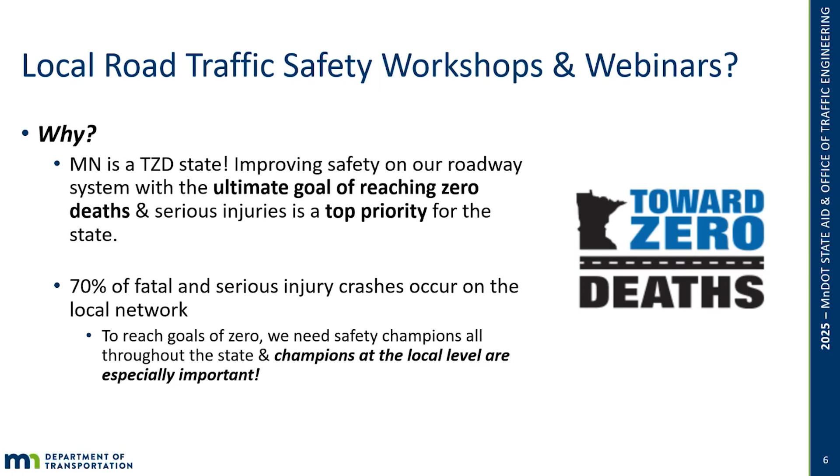Education is vital, but it is one piece of Minnesota's multifaceted strategy to reach zero deaths. First, Minnesota is finalizing its 2025 through 2029 Strategic Highway Safety Plan, which guides our efforts through the 4 E's: engineering safer roads, enforcing traffic laws, enhancing emergency response, and educating all users. Second, because nearly 70% of serious injury crashes occur on local roads, MnDOT directs about 70% of its federal safety funding to local agencies, aligning resources with where they are most needed. Our workshops and webinars are a key part of this comprehensive approach, empowering local roadway owners with the tools and knowledge to make our roads safer and save lives.

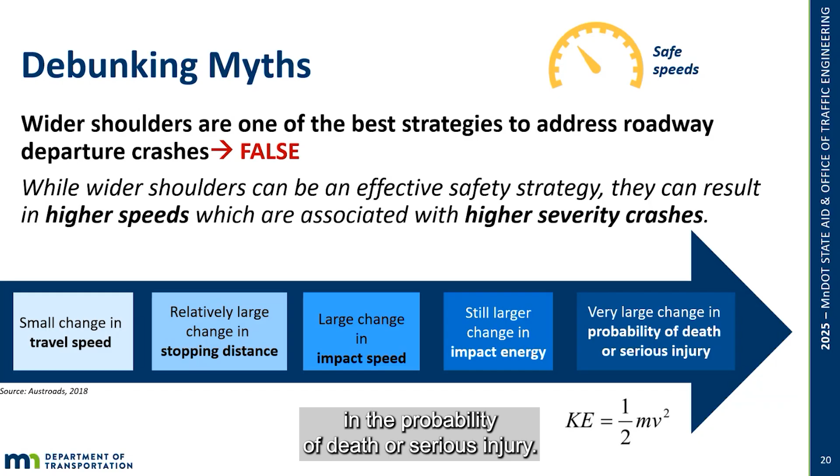That has an even larger impact on the energy that's transferred to the human body. And from what we just talked about with the safe system approach, we recognize that this impact energy has a really large impact in the probability of death or serious injury. If we go to the next slide.

Another way to look at this is to look at some of the expected crash reduction factors and planning-level cost estimates for these strategies. Howard's going to get into a lot more details, but quickly comparing the crash reduction factor of paving deteriorated shoulders compared to rumble strips, enhanced edge lines, and chevrons, we see that paving shoulders is much less effective at reducing crashes. It's also a lot more expensive. That's why we're focused on strategies like rumble strips, enhanced edge lines, and chevrons, these lower cost, higher effective strategies.

Another note is that MnDOT has found that often the reduction of crashes where wider shoulders are installed is actually a result of other elements installed along with those wider shoulders, things like rumble strips, improved side slopes, access management, those kinds of things. So we wanted to address that up front, why we're not going to talk about wider shoulders and why we're focused on these other strategies today.

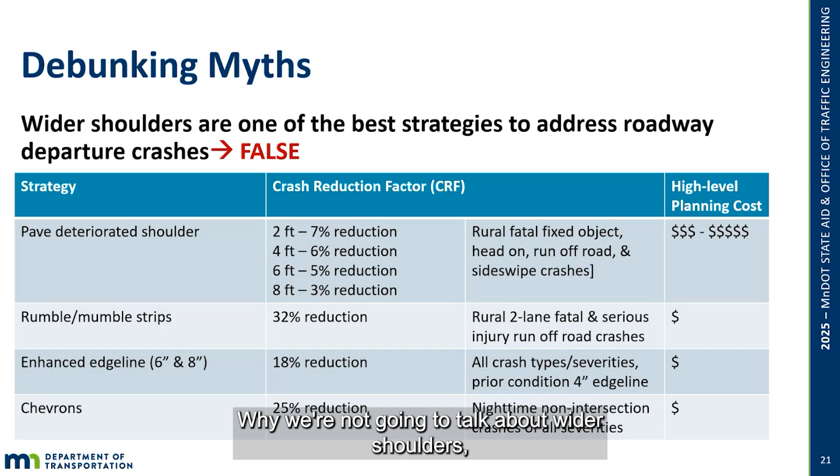For the next 90 minutes or so, Vic Lund and I will be sharing information about Minnesota's approach to addressing road departure crashes. I'll spend most of my time providing an overview and then talk about effectiveness, and Vic will be sharing his

observations and experiences in St. Louis County. Next, please. Oh, right here.

We follow the basic approaches identified in AASHTO's Strategic Highway Safety Plan, and Germa and Derek have mentioned it, but the notion is the best thing to do is keep vehicles on the road. If they don't leave the road, then what's outside your shoulder and down in the ditches is really not of any consequence. So we focus on things proven effective at helping keep vehicles on the road, making the road edge more clearly defined so people know where it's at. Things like rumble strips, and we'll also talk about something called mumble strips, I'll explain those later, enhanced ground-in wet reflective pavement markings, chevrons, and a treatment to enhance friction in curves when the pavement is wet.

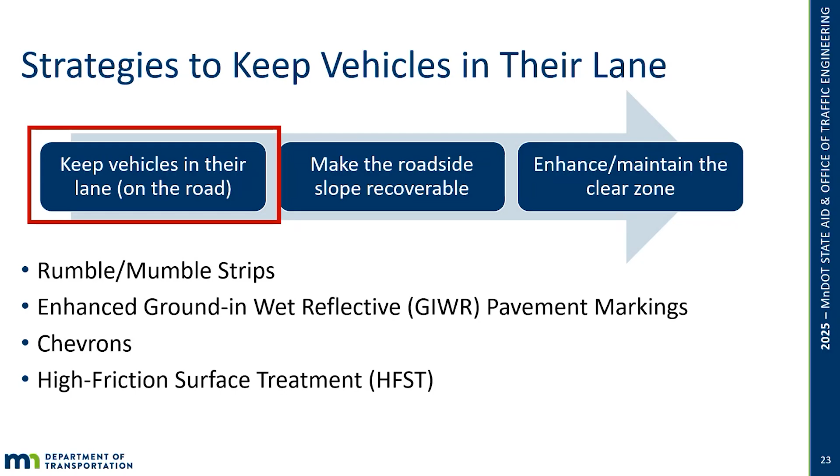Before we get started though, Maddie has a polling question for you. So for each of these countermeasures, we are going to have two questions for you to answer. Please keep that Mentimeter pulled up. The first question we'll ask at the beginning every time is how would you rate your level of knowledge, specifically this time on rumble and mumble strips, on a scale of 1 to 5, 1 being not familiar, 5 being very familiar.

We'll give this a few more seconds for folks to respond, but it looks like on average folks are pretty familiar with rumble and mumble strips. We'll head to the second question, a short answer question: what are the barriers that prevent you from implementing rumble and mumble strips right now? This is our first one, but these two questions will reappear.

Okay, we've got noise level, a lot of noise complaints. Public with the noise, absolutely. People, money, cost, narrow pavements, no paved shoulders, again the community, funding, road width, county or city standards, and again some of that public pushback. So we'll keep moving through our presentation, but appreciate your insights, everyone.

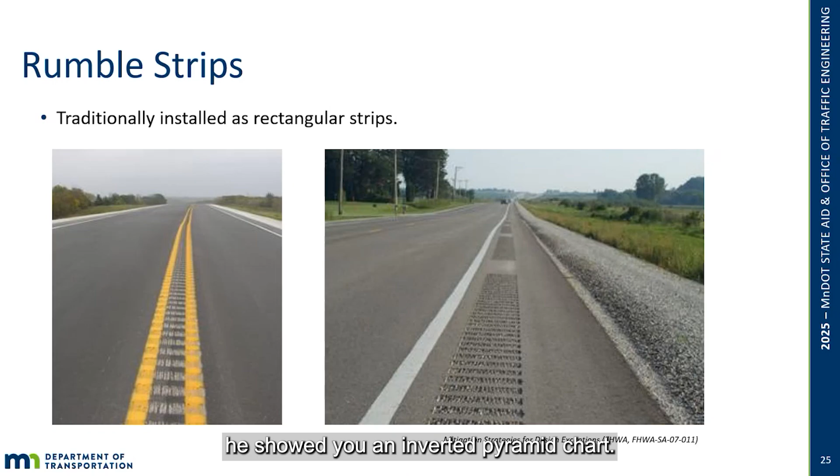As Derek mentioned, we choose to focus on road departure because road departure crashes account for 50% of our fatalities and 40% of our severe injuries. If you recall, he showed you an inverted pyramid chart. The number across our entire county system is very large, something on the order of

150 of these severe road departure crashes a year, but that's over a 40,000 mile system. The density of severe road departure crashes per mile is 0.01 per year, meaning any given mile is likely to see a severe road departure crash once in 100 years. Another statistic is that 90% of the locations that had a severe road departure crash in any given year hadn't had another one in the 5 prior years. So the low density of these crashes was a real challenge.

How do you develop a strategy to prioritize the system, in order to identify the segments that are most at risk and then worthy of implementation of a project?

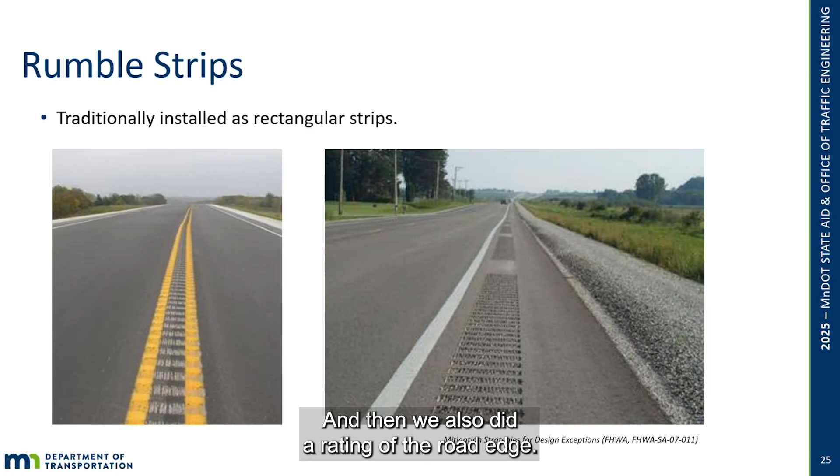Segments with 3 or more of these risk factors represented a minority of the system, about 30%, but a majority of severe road departure crashes. The priority segments had crash densities that were 40% higher than average.

A strategy for selecting safety countermeasures was based on the notion that the solution to a low density of crashes is to widely deploy strategies over as many miles as possible. The only way to do that was to focus on strategies that are low cost. That led us to the use of rumble strips and enhanced edge lines.

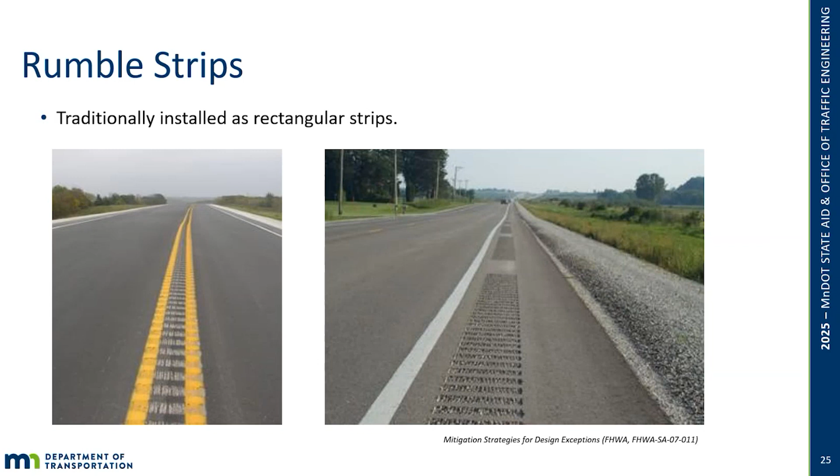To date, rumble strips have been deployed along about 3,000 miles of our paved county system and over 8,500 miles along the state system.

Following the installation of these rumbles, MnDOT has found substantial crash reductions, lowering the number of fatal and injury crashes and run-off-the-road crashes. You can see in the photos here that our original rumble strip design was a rectangular cut that started at the road surface. I'll come back to that again in a minute.

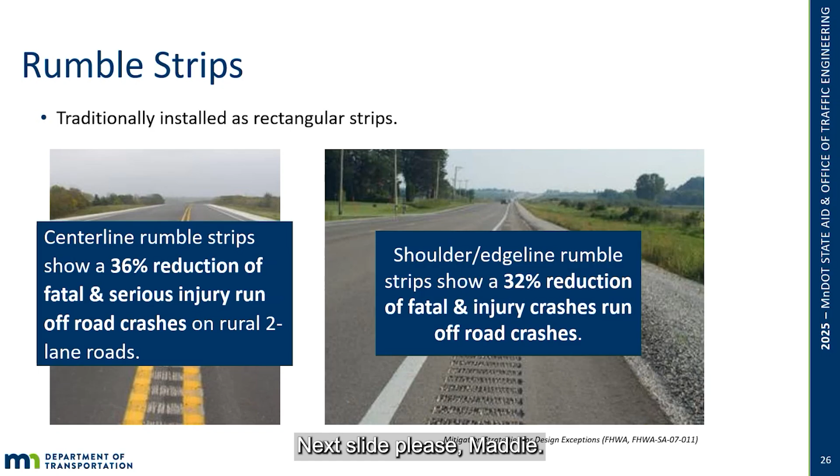This photo shows what we call a rumble stripe, where the edge line is placed over the groove. We encourage counties to consider this if they're considering an edge rumble. Installing the pavement marking over the groove has two particular benefits, primarily at night and in wet weather—there'll always be some of the marking that is above the water level. Rumble stripes, as we'll show in a photo later, improve wet weather nighttime visibility.

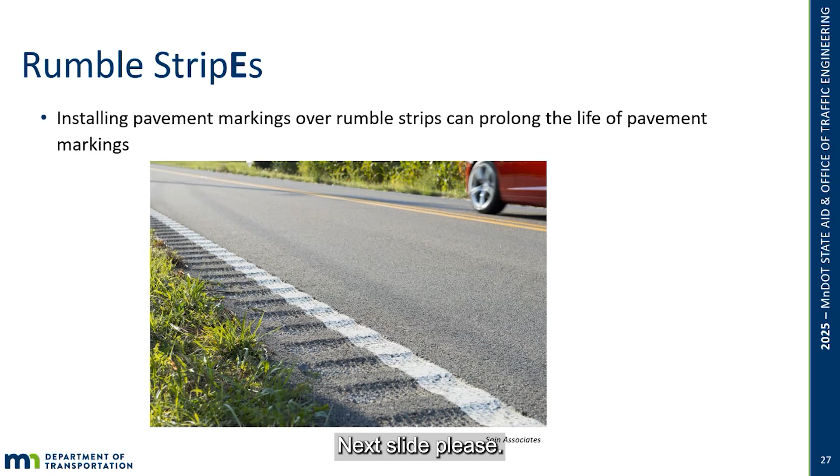We've also found that putting some of the pavement marking material down in a groove prolongs the pavement marking life. It makes some of the pavement marking inaccessible to snow plows, which we'll talk about several times. I also mentioned the notion of mumble strips, or sinusoidal rumble strips, and you can see what they look like.

Just a little bit of background. The first wave of installation of rumble strips done by the counties had a good effect. Obviously, the number of crashes went down. But when you're first, there are things you just don't anticipate.

One of the things not anticipated was the level of complaints from adjacent homeowners about the noise. The increase in noise level was real, something on the order of 15 decibels, and attempts to justify the use of rumbles on the greater good associated with crash reduction didn't make a lot of sense to homeowners who would say there's never been a crash in front of my home. Given the density of 1 every 100 years for these severe crashes, it's entirely likely the homeowner was telling the truth. There had never been a crash in front of their home. Why are we doing this?

In our selection process that we suggested to the counties, we even accounted for the presence of homes. We only made the recommendation where the density of homes was very low, less than 1 per every quarter mile. But complaints were still common.

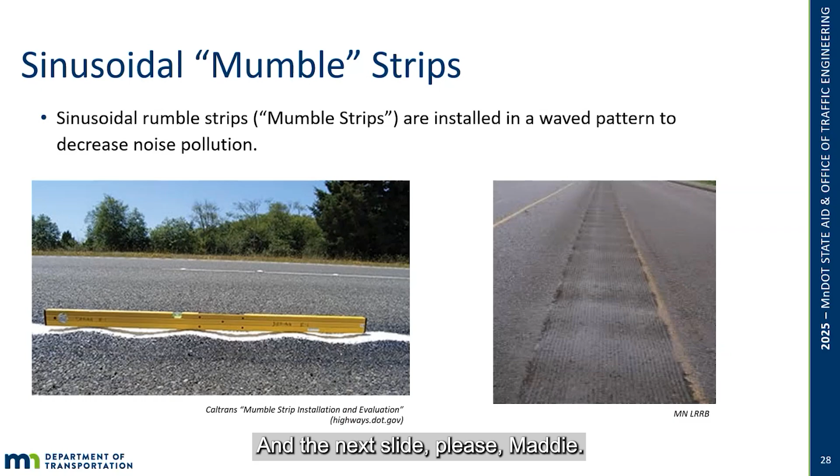The sinusoidal rumbles reduced the exterior noise levels, but were able to maintain interior noise levels and vibrations. MnDOT found there was no difference in performance between the traditional vertical cuts, rectangular cuts, and the sinusoidal cuts. So the use of sinusoidal rumble strips has proven to be a very good thing.

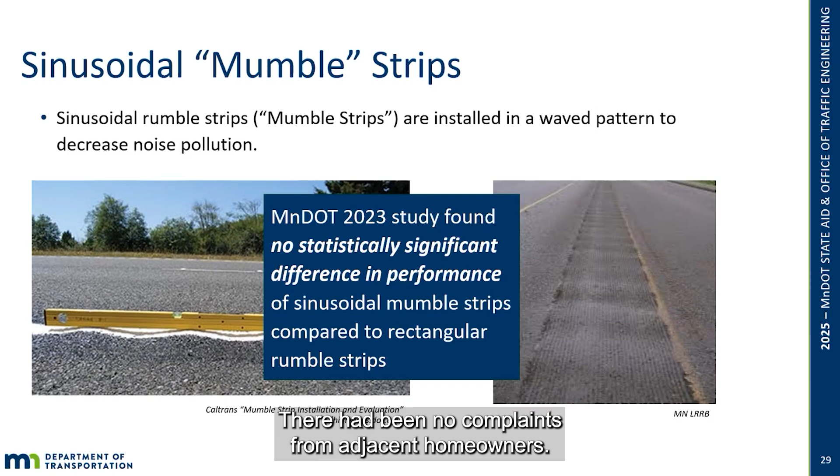We've asked in each of the meetings we had last summer whether people heard any public complaints after they used the sinusoidal rumble. The answer was uniformly no. There had been no complaints from adjacent homeowners. Next slide, please, Maddie. This is the proof, if you will.

Over on the far right-hand side of this graph, you can see that the increase in decibels and noise levels associated with the rumbles was substantially reduced. This explains why there have been no complaints. So most agencies that use rumbles are in fact converting over to the sinusoidal strips. There's no price differential, the effectiveness is still there, and the complaints basically go away. So it's better all the way around.

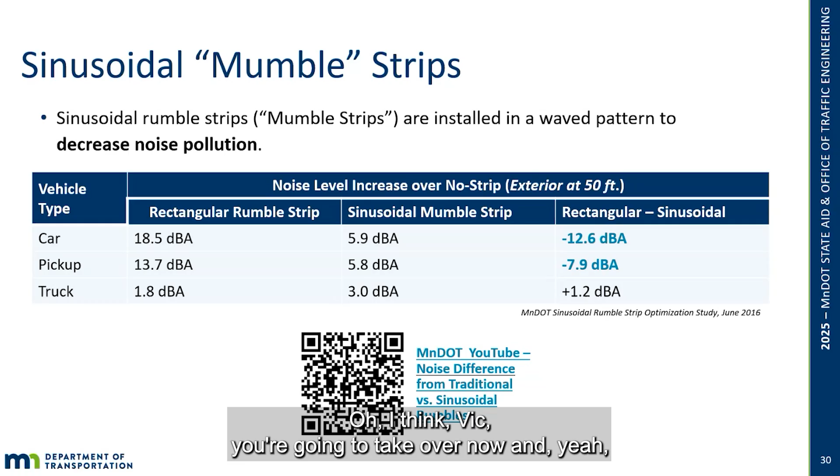Let's see. Oh, I think Vic, you're going to take over now. Yep, talk about your experience in St. Louis County.

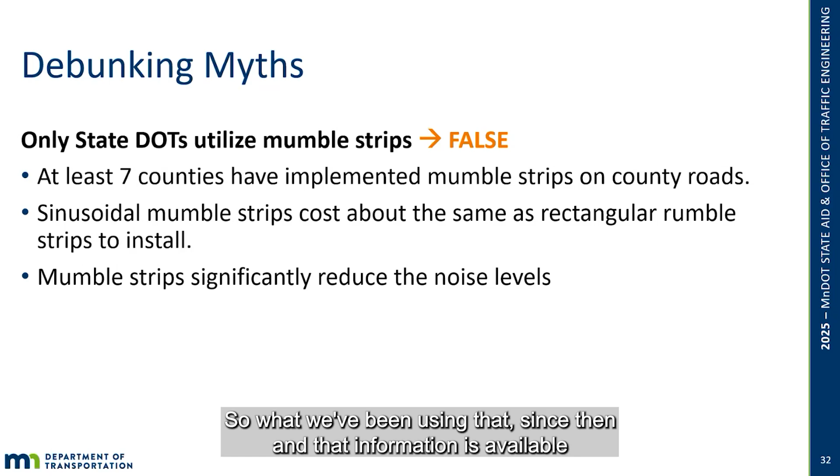Like Howard said, there was a Minnesota effort about at least 7 years ago to design our version of sinusoidal rumble strip. We looked across the country at different styles, California was one of them, and we came up with something similar to other states but with a definite Minnesota variation. We've been using that since then, and that information is available on the Minnesota DOT website if you're interested. Next slide.

One of the things we've heard as an incidental benefit is for snowplow drivers. Here in St. Louis County, in northeastern Minnesota, we sometimes get lake effect off Lake Superior, or blizzard conditions, typical Midwest winter conditions. One of the things we've heard from snowplow operators is an appreciation for having rumble strips either at the center line and/or at the shoulder, because it helps them in those very limited visibility conditions to know where they are on the roadway.

For example, I didn't grow up in the Upper Peninsula of Michigan, but I lived there for some time while going to school. I've been through many interesting winter weather events where you're driving 5 miles per hour and that seems too fast.

But it's times like that where it's very appreciated. Obviously, that's not necessarily the focus of rumble strips. Most of the target crashes we're looking for occur during the daytime, during good weather conditions, good visibility, those sorts of things.

In the St. Louis County Road Safety Plan, we've been implementing 3 types of rumble strips here in our county, and a lot of counties in the state have been doing the same: centerline, shoulder rumble strips, and shoulder rumble stripes.

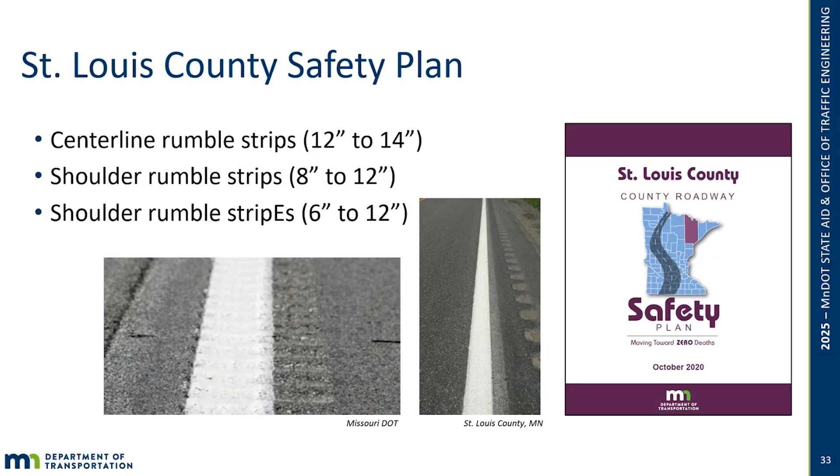So one of the things we did for our centerline rumble strip project, where we deployed a sinusoidal design, is we looked at the question of prioritization and which roads ought to be treated. What we did here is similar to what the County Road Safety Plan took, in that we binned our segments by ADT, and also by number of serious cross centerline or head-on crashes. And what we found is that...

43% of our system is over 1,000 vehicles a day. Excuse me, I said that backwards. The over 1,000 vehicles per day roads are 10% of our mileage. So it's a very small percentage of our mileage. However, almost 50%, climbing up towards 50%, of our serious head-on crashes are occurring on just 10% of our road mileage. That was good enough for us to say we're just going to prioritize roadway segments that have an ADT greater than 1,000 vehicles per day.

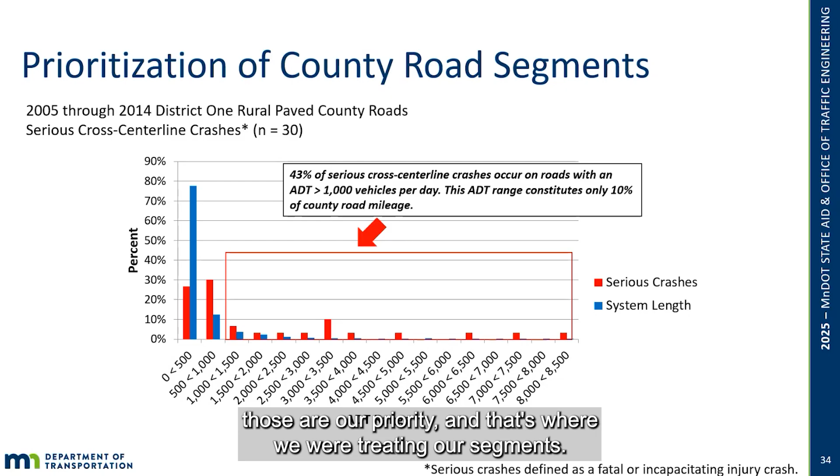We didn't look at any other risk factor. We just said those are our priority, and that's where we're treating our segments. Next slide.

This centerline rumble strip project that we completed was in 2018. It was our first project, and coincidentally, it's also been our only centerline project. The reason for that is this concern about joint deterioration. I do want to recognize that there is debate in the industry about whether rumble strips in a joint accelerate the deterioration.

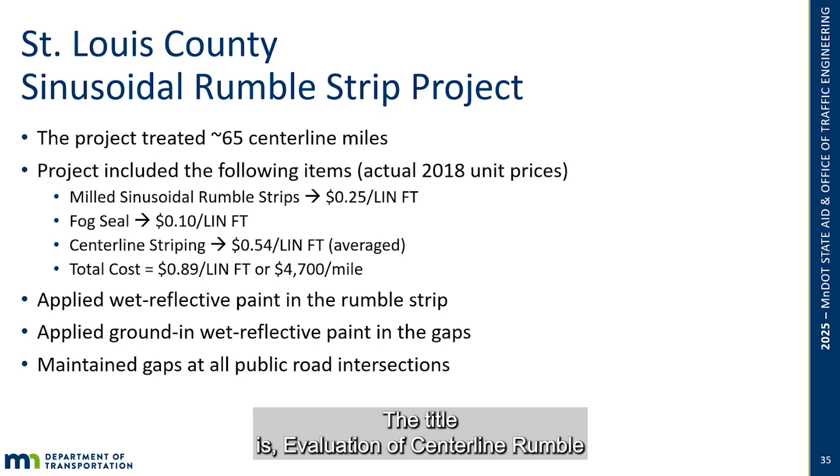There was actually a Michigan State study. Look it up: the title is 'Evaluation of Centerline Rumble Strip Impacts on Short-Term Pavement Performance,' performed by Michigan State University, focused in the state of Michigan. That research suggested there was not an acceleration of joint deterioration. I mean, joints are always going to deteriorate, right? So it's not a question of deterioration, it's a question of the rate of deterioration. They suggested it may not necessarily be as cut and dried as some might suggest. So something to think about.

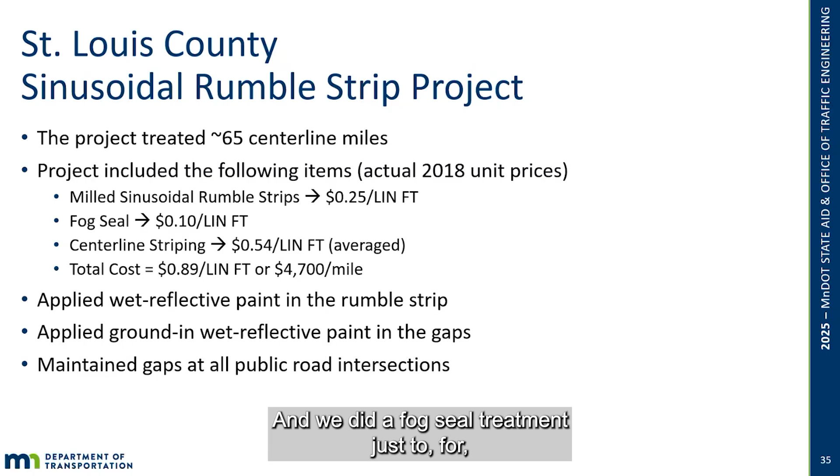Our cost per mile for our rumble strip project was about $5,000 per mile. That included the pavement markings, and we did a fog seal treatment just to seal up that centerline joint. Next slide.

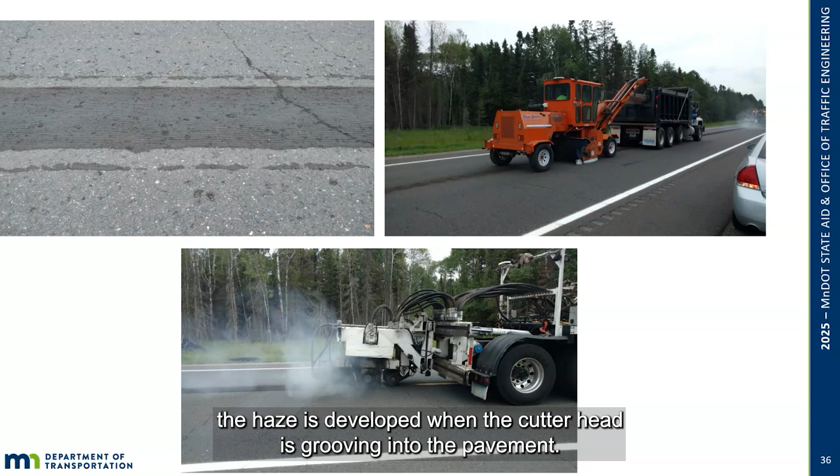All right, some pictures that we took when this process was ongoing. It's a pretty simple process, and that's why the cost is so low. We have the milling machine in the upper right corner. On the far right of that image, you can see the haze that develops when the cutter head is grooving into the pavement. Right behind it is a truck and sweeper combination picking up all the debris that was grooved out of that marking.

One of the things, I'll save this for the next slide, I suppose. Let's go to the next slide.

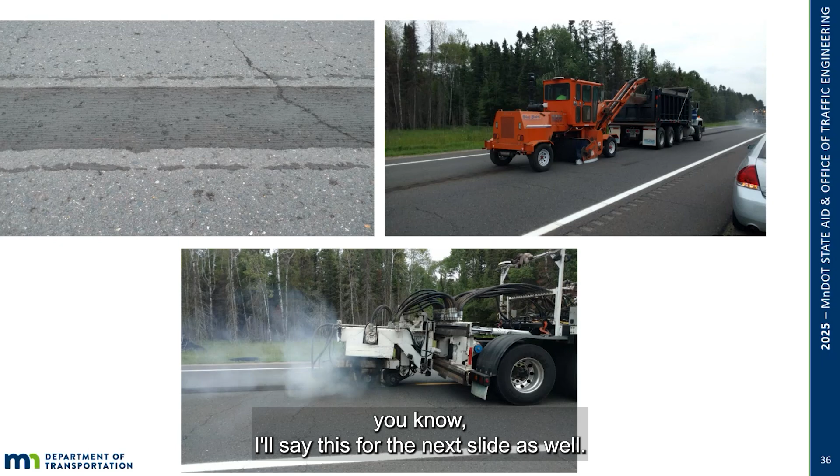Some of the things I learned are on the next slide. First, always keep your attention on what you're doing—the focus is safety, right? That was one of the common themes through all the phone calls I had: it's about safety, it's about safety. I'll give a testimonial about that in a second.

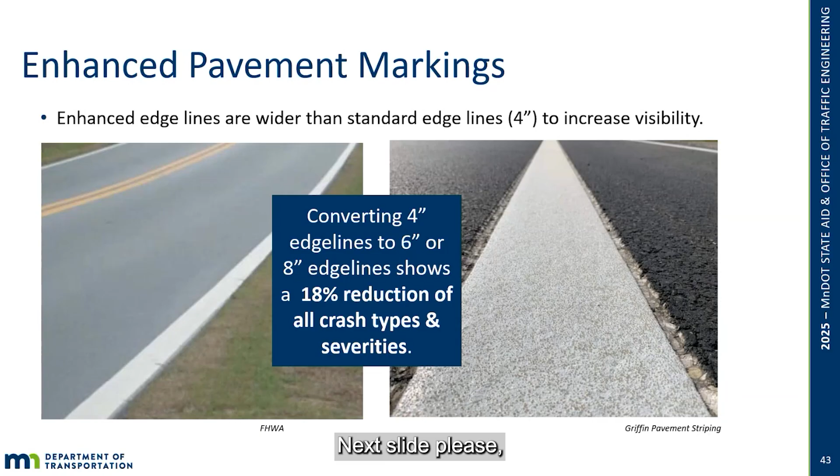All right, so we talked about this notion of ground-in wet reflective markings. When we began addressing road departure crashes 15 or so years ago, the highest priority was focused on what we could do to make the road edge more visible to the public.

We were aware of the noise issue, and at the time sinusoidal rumbles had not yet been invented. So we focused on a strategy that would enhance visibility, particularly at nighttime in wet weather, without causing noise complaints.

I mentioned one of the first counties to deploy edge rumbles—being first out, there are things you don't anticipate. The county engineer picked a road where he clearly had road departure crashes, but also a high density of residential development. The worst possible thing happened: he paid to put the rumbles in, and about two months later, he had to pay to cover them up.

When it came time for us to suggest a strategy for this road as part of their county road safety plan, the county engineer reminded me of the challenge he'd faced previously. I said I was aware of that, and no, I wasn't going to be suggesting rumbles again. There was this strategy called ground-in wet reflective pavement markings.

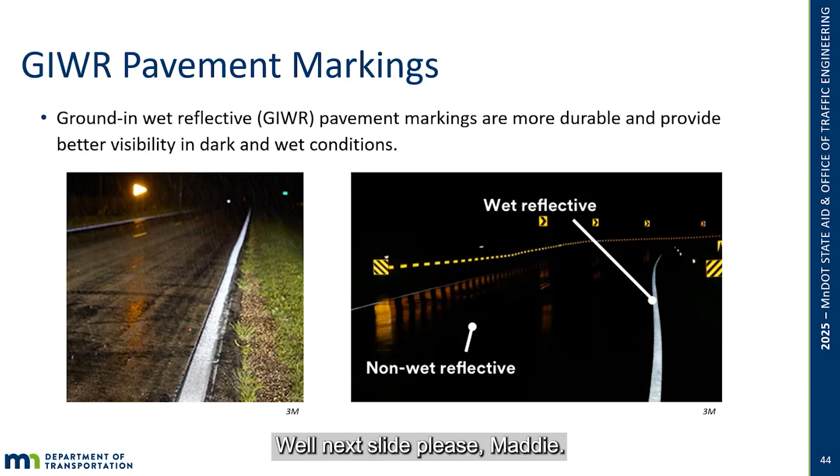Follow-on research, next slide please Maddie, is very supportive—a 25% reduction in run-off-the-road crashes during wet conditions is a very positive result, linked with the idea that the durability and lifespan of the pavement marking is enhanced.

I think this is even more important now because Federal Highway has just initiated a requirement, like they did a dozen years ago, of minimum levels of retroreflectivity that must be maintained for pavement markings, just as they had done with sign sheeting material a number of years ago.

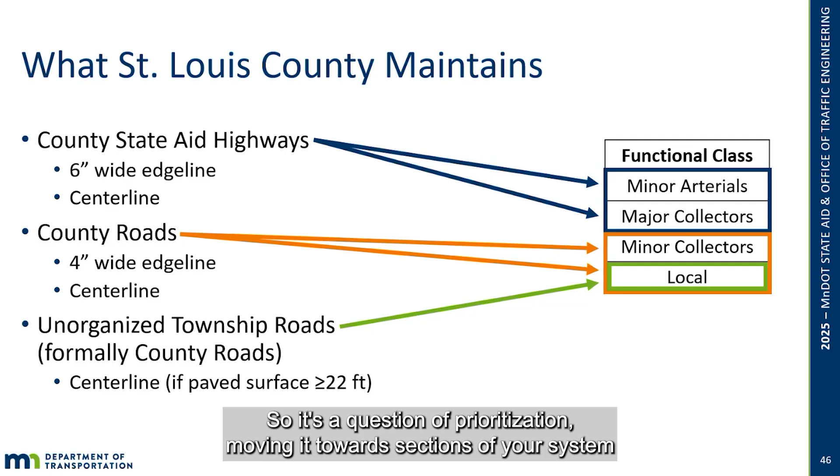The reason we do this is because we have limited funds. We just can't afford to pay for 6-inch markings on everything. So it's a question of prioritization, moving toward sections of your system that are at risk.

So the County Road Safety Plan recognizes and promotes at least two different types of pavement marking strategies. The first is 6-inch paint surface applied, typical for lower volume roadways that are at risk as identified by the County Road Safety Plan, but have very few vehicles. We can't place grooved-in wet reflective markings everywhere. That's typically a 1 to 2 year service life, and we replace those about every 2 years.

The second is the 6-inch grooved-in wet reflective epoxy or multi-component type pavement marking. We're getting 4 to 7 years out of those, with the plow frequency we experience here in St. Louis County. We're utilizing a large part of our Highway Safety Improvement Program funding, distributed to Minnesota and then by MnDOT to local governments. It's federal funds, which means there's an extra process, but besides the safety benefit, it's an additional funding source to supplement your pavement marking budgets.

Think about St. Louis County - we're a unique creature. We have 3,000 miles of roadway, half of that is paved, 1,500 miles. We invest approximately $3 million a year in pavement markings. That's a sizable percentage - the ratios work out that way based on your system, but it's a sizable portion of your budget.

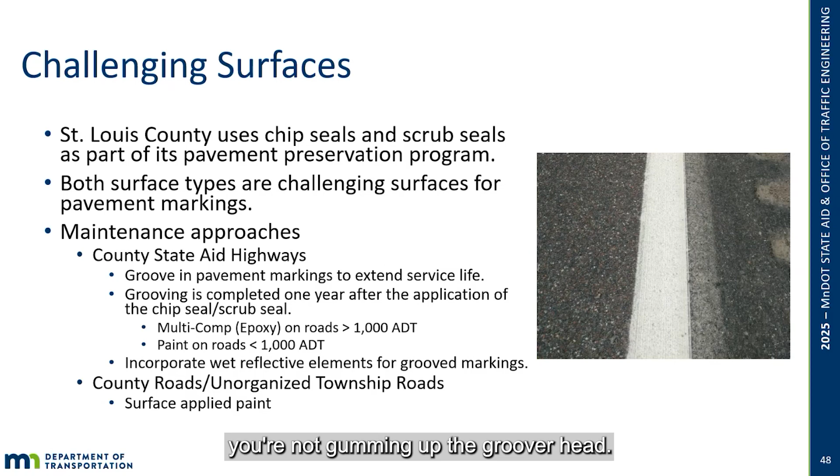We realized we can groove in those markings the year after. Here in St. Louis County, we'll pave a road in year 0. In year 1, we'll chip seal it with a surface applied epoxy. So year 0, surface applied epoxy. Year 1, surface applied epoxy. In year 2, we'll come in and do a grooving project. We'll groove in the wet reflective epoxy edgeline and centerline markings on those roads. That chip seal can support having that grooving activity within a year — it's cured enough that you're not gumming up the groover head.

One thought on your wet reflective specification: if you're deploying wet reflective markings, think about the understanding of wet continuous versus a wet recovery specification. Some vendors or material suppliers provide a wet recovery product, and some provide a wet continuous product. Wet recovery means after it rains and stops raining, the pavement's still wet, but there isn't a thick film of water on the surface. Wet continuous is a condition where it's raining, there's a relatively thick film of water on the pavement surface, and you can still see the marking through that active rain event.

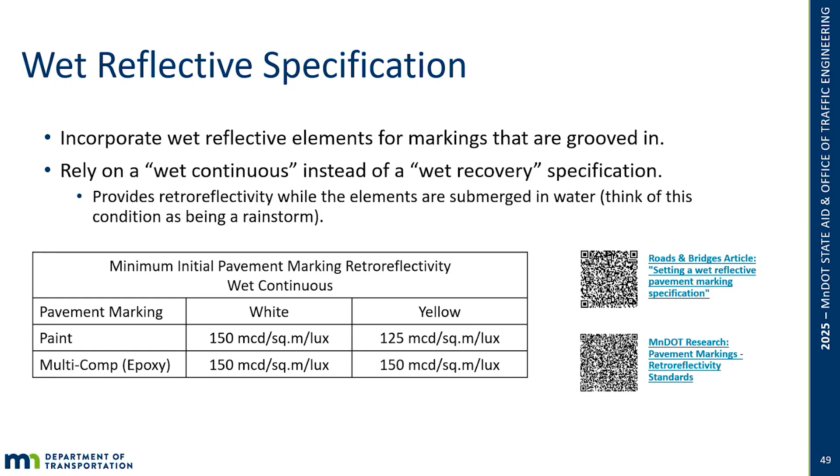We've been using a wet continuous specification on all of our wet reflective markings. It provides that better benefit during nighttime rain events, where a traditional non-reflective marking makes your road turn black in those conditions. I have a couple resources on the slide — if you can't see them, you can download the presentation afterwards. One is an article through Roads and Bridges that I was part of a few years ago, talking about setting a specification. MnDOT also has research about establishing a wet specification you could consider.

Cost experience between the two typical markings we're using: 6-inch paint surface applied is your cheapest, about $1,000 to $1,500 per mile, based on 2025 cost data here in St. Louis County. For your grooved-in marking, 6-inch edge line on both sides of the road, it's about $8,500 to $10,000 per mile. That's why, as I explained earlier, recognizing it's either at risk or a higher function roadway, we're replacing those with 6-inch wet reflective markings.

The last thing I'll mention before handing it back to Howard: you'll notice the costs we're sharing are in the thousands of dollars per mile, not hundreds of thousands or millions. This recognizes there isn't enough safety or general funding to support reconstruction activities that clear up or improve the roadside, add a road shoulder, and so on. Those are great to do when you have the opportunity, but in many cases you're just never going to have that opportunity. That's why we've shifted toward proactive, lower cost strategies we can deploy widely over a significant portion of the system at thousands of dollars per mile.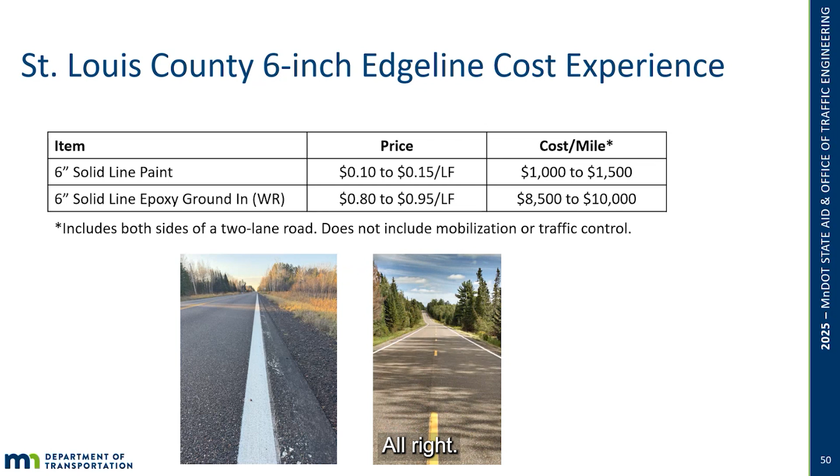All right, next slide. I think this is a polling question.

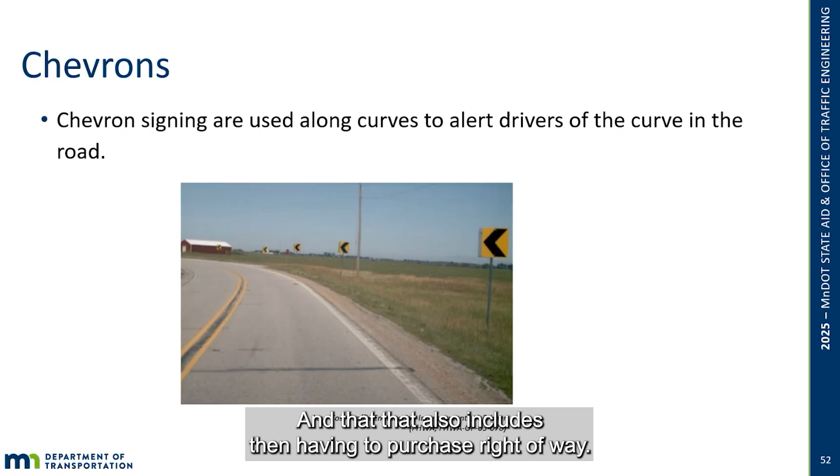So what we've seen, chevrons have now been installed by the counties at over 4,000 high priority curves. And MnDOT has done similar installation at over 700 of their priority curves.

Now the piece of trivia that I'm betting you don't know. The first chevrons in Minnesota were installed as an experiment since they weren't yet in the Manual on Uniform Traffic Control Devices, and by permit along a segment of US Highway 10 in the southeastern part of the metropolitan area. That segment sits up on the bluff above the Mississippi River between Hastings, Minnesota and Prescott, Wisconsin.

More background: chevrons were invented by the 3M Corporation in the late 1970s, primarily as a tool to help market a new product of theirs called high-intensity sheeting material. I happen to know this because I worked for the highway department at the time and was part of the staff tasked with reviewing 3M's permit to install these signs.

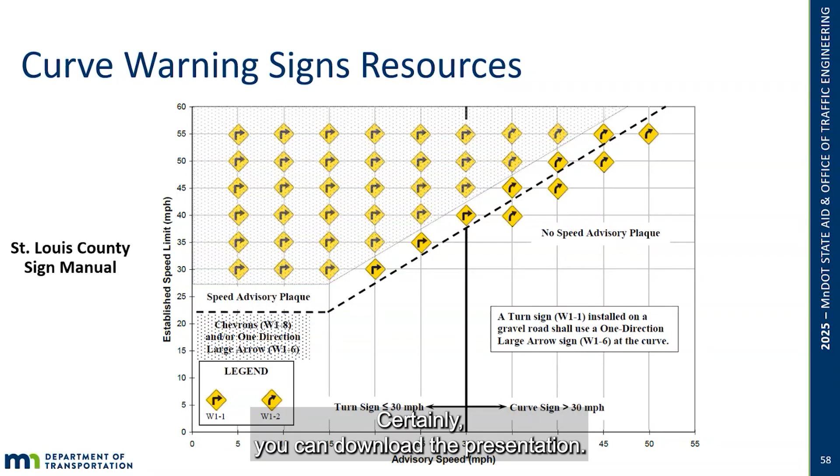We share it as an example of what you could do. Certainly, you can download the presentation, grab this, and consider it for your agency too. Next slide.

Finally on this topic, I wanted to showcase a couple resources that Federal Highway has put together. They produced a couple videos on YouTube about how to stake out and install curve warning signs in a curve. Some helpful tools you can use and pass off to your sign crews - they can watch these videos and it helps them place the chevron signs appropriately.

The one thing I will mention, and this might differ from the MUTCD, which is fine, is that the first chevron sign when approaching a curve - you should think about having that in the tangent extension of the tangent approach to that curve, so that chevron sign is front and center in the driver's field of view. All right, next slide.

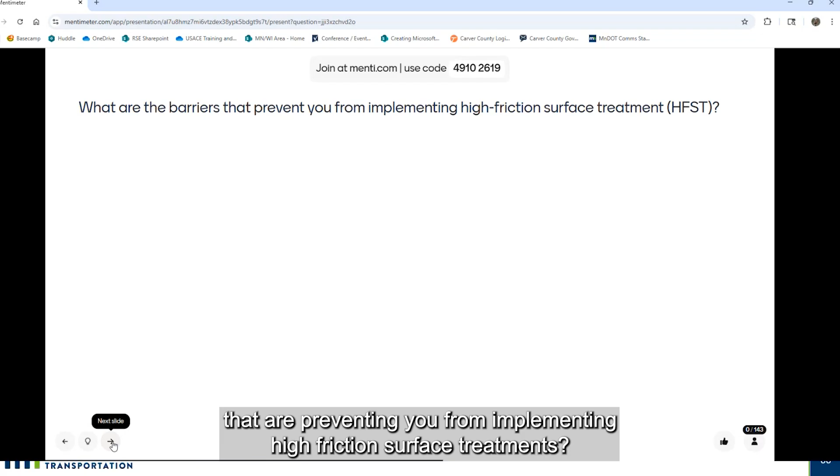Starting right in the middle, just like the rest of ours - maybe we're slightly less familiar with high friction surface treatments overall. Give it 5 more seconds here. All right, so for those that are familiar, what are those barriers preventing you from implementing high friction surface treatments? Again, cost is coming up today - this is a recurring theme. Ongoing maintenance, cost of materials, the funding. Okay, new - maybe where to install some of those things.

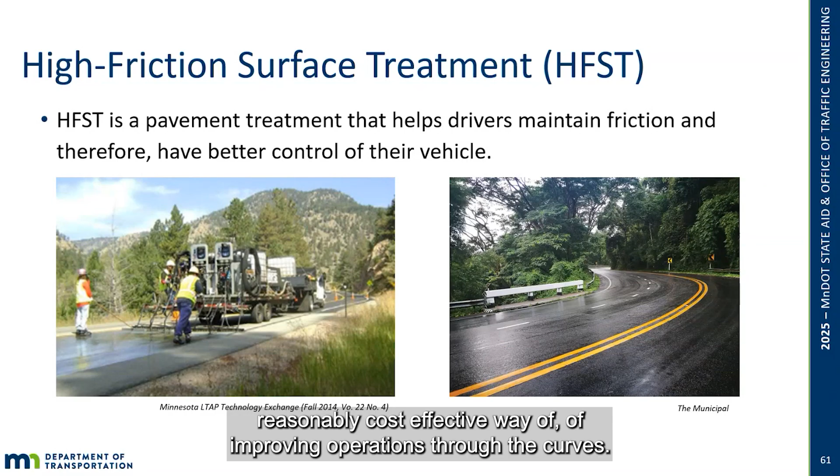Next slide, please. And so again, the numbers are incredibly supportive of the notion that improving friction in these curves results in a reduction of crashes, particularly during wet weather.

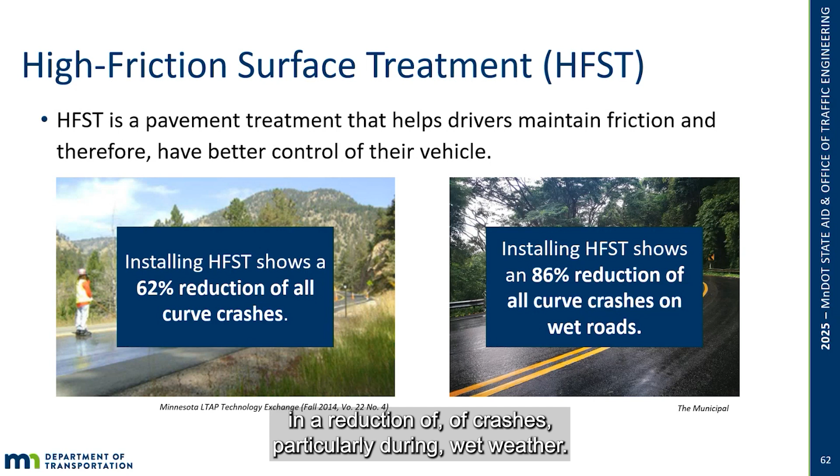So with that, Vic, I'll pass it on to you, please share your experiences in St. Louis. Thanks, Howard. Our first high friction surface treatment project we implemented was in 2020. But let's first talk about the physics.

Picture yourself playing with your kids, or maybe when you were a kid, swinging a ball on a rope or a tether, and that rope connected to the ball generated the centripetal force to keep that ball from proceeding in a straight line where it would have gone if it hadn't been for the rope. The analogy for the curves is that your tires are the rope - they generate the centripetal force to keep your vehicle in the curve instead of your vehicle cascading off the outside of the curve on a tangent alignment.

So here's the minimum radius design equation.

Okay, so you find this in the AASHTO Green Book. So determining the minimum radius of a curve based on your design speed. But I solved it for velocity, okay? And what you're seeing is there's three variables, and Howard already mentioned these: the radius, the super elevation, and the friction.

So in order to adjust your radius and super elevation variables, you have to reconstruct the curve, okay? Which sometimes when you have the opportunity, you should be doing that. Always take the opportunities when you can. But most of your curves are probably going to be the way they are for many years to come, decades to come, which means you still have an opportunity to affect this equation, and it's through your friction.

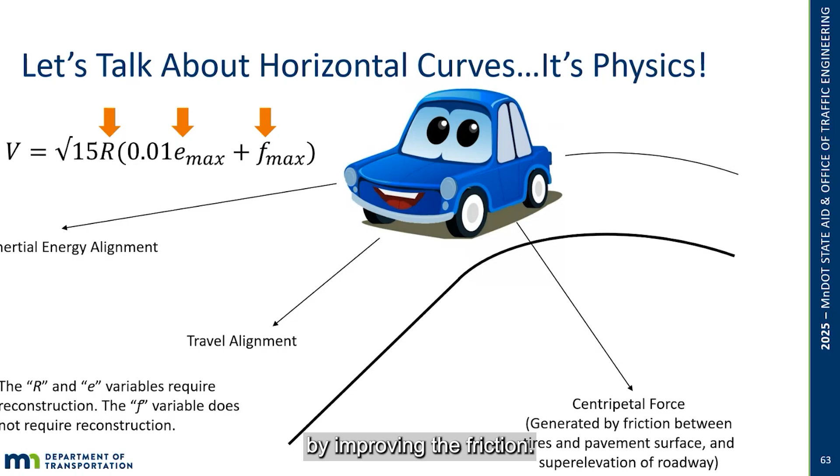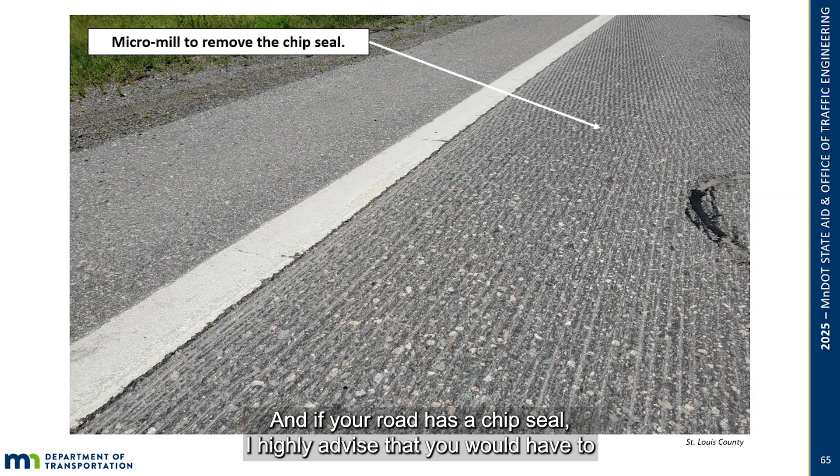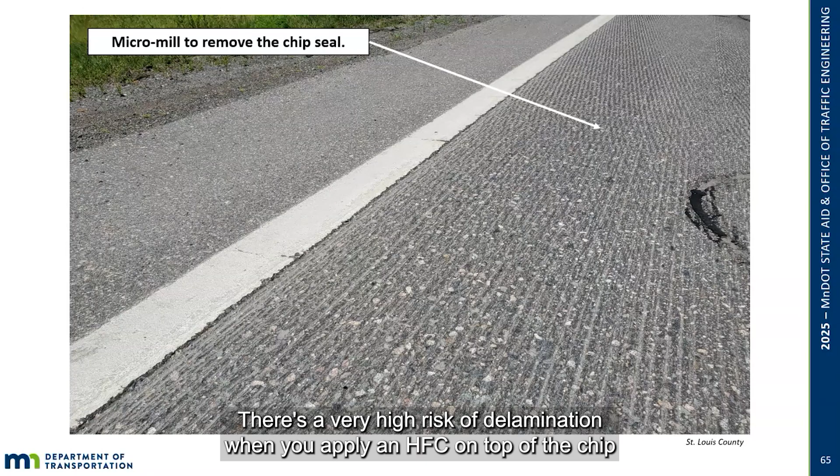Next slide. Okay, just a couple quick pictures for just showcasing how this process works. A lot of our roads have chip seals on them, and if your road has a chip seal, I highly advise that you would have to micro mill or remove that chip seal prior to deploying or applying the HFST. There's a very high risk of delamination when you apply an HFST on top of a chip seal, which is why we got it back down to the original pavement section.

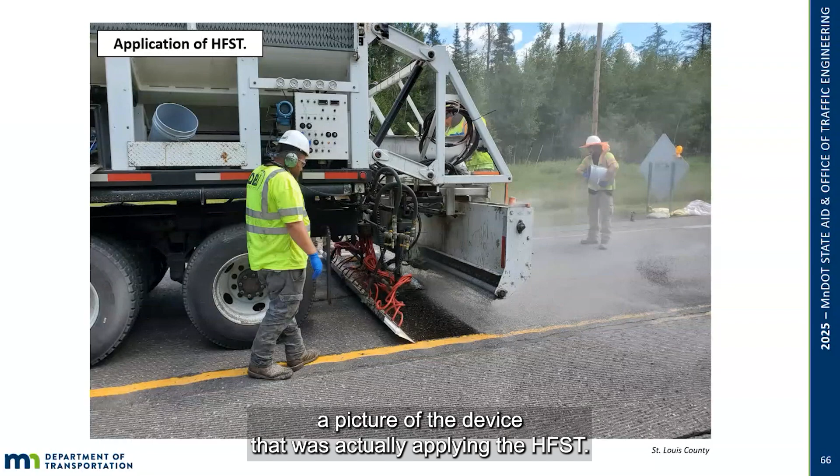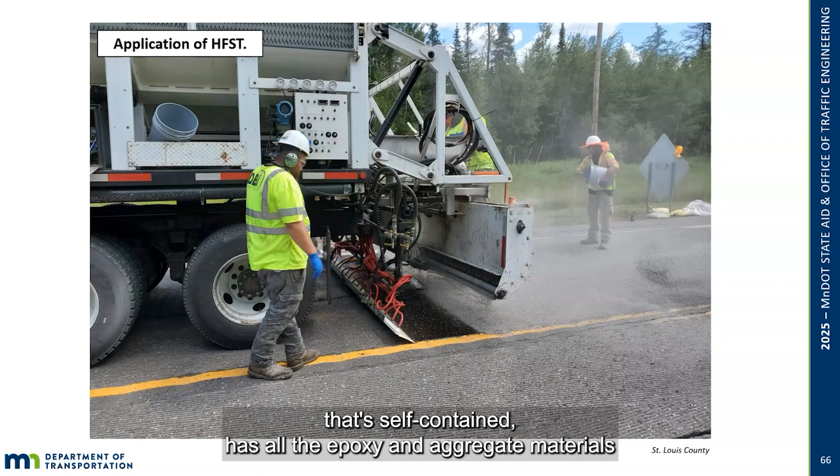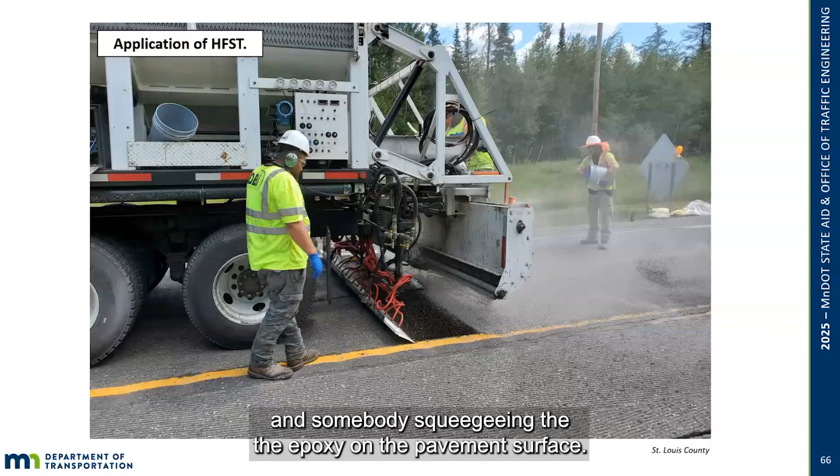Next slide. This is a picture of the device that was actually applying the HFST. This is an automated type process. So you have 2 process types or installation methods. You could have an automated process, which is a truck that's self-contained, has all the epoxy and aggregate materials on the truck itself, and deploys it in a very uniform fashion. The other methodology would be a manual process where you have somebody spraying the aggregates and somebody squeegeeing the epoxy on the pavement surface, okay?

We've done both. They seem to have good results on the manual side. I was a little concerned on the consistency, but it seemed to be pretty good consistency on the manual approach. So we've had good experience with both of them. But, you know, the surefire way, of course, is the automated process that you see in this picture. Next slide.

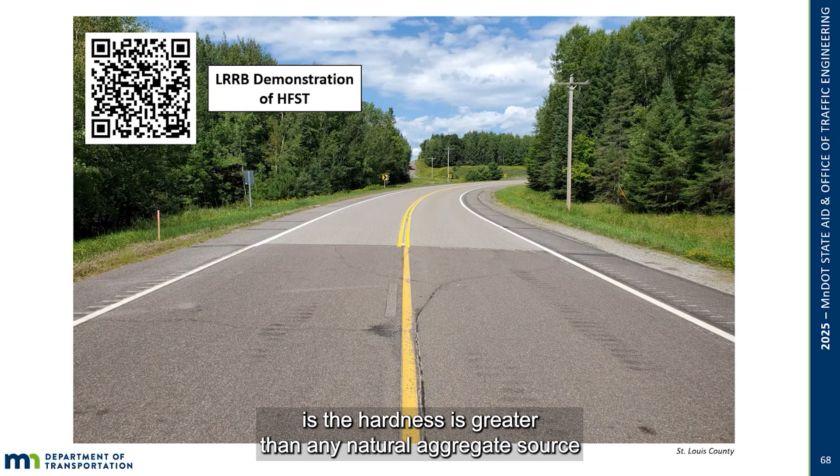Yep. Okay. This is a picture of one of our HFSTs that we installed. The light color portion of the road, that is the HFST. It's a calcined bauxite aggregate. It's a manufactured aggregate. And the reason we use calcined bauxite is the hardness is greater than any natural aggregate source that exists. And you get longevity in the application that we're expecting about 10 years of service life for our HFSTs.

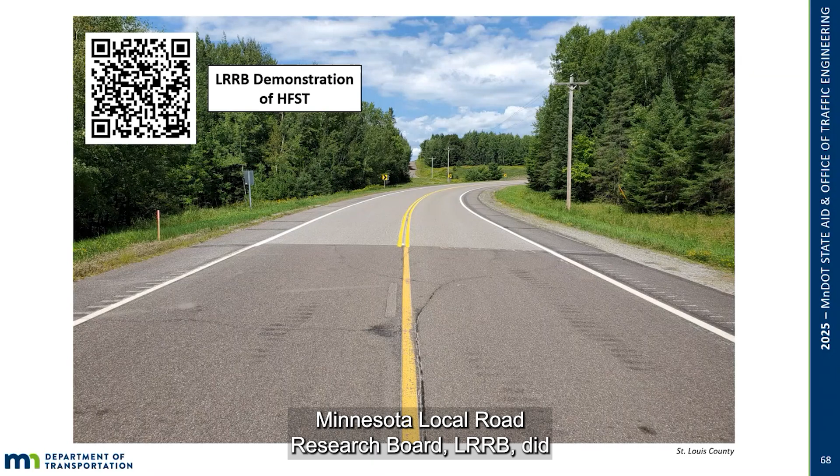You can see a little web link there. Minnesota Local Road Research Board, LRRB, did a showcase of a St. Louis County HFST application. You can watch the video, and I'm in that video, I suppose. All right, next slide.

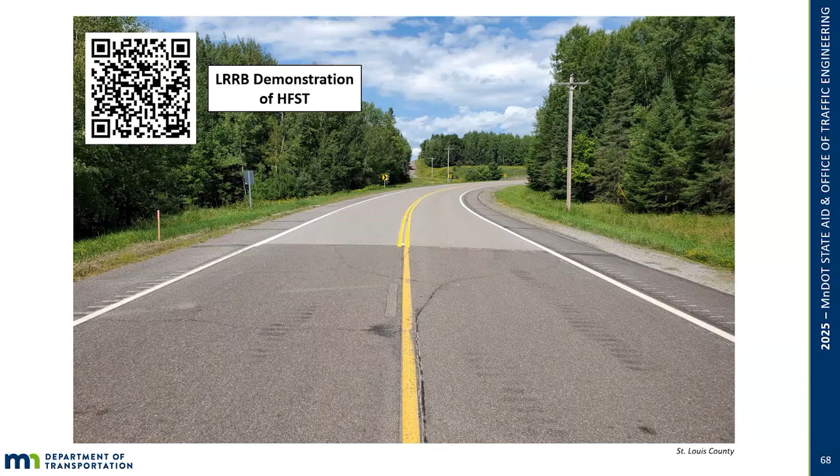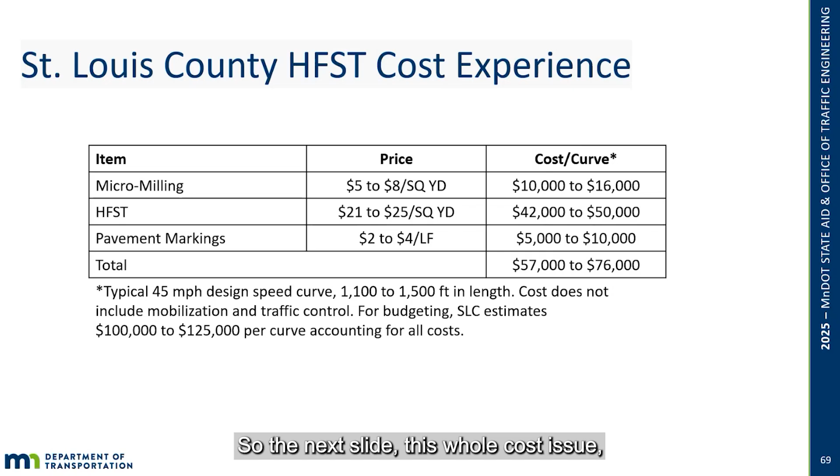So the next slide, this whole cost issue, and I'm glad that I saw those responses in that poll, very informative. That cost is the issue. Well, that's a research project, if you don't mind me plugging, from the Minnesota Local Road Research Board.

You can find the report here and the summary of the project on that web blog here.

It's a project where St. Louis County was assisting with this research, using a taconite material. It's a natural aggregate from the Iron Range here in Minnesota, but taconite is the overburden rock, with some iron impregnated into it. We were using that as a substitute aggregate. You can find the results on that site, but because it's a natural aggregate here in Minnesota, whereas a lot of the calcined bauxite comes from overseas, we do believe there could be a cost advantage from this.

Secondly, the performance of it was very similar. I have to be careful with the details, but it was deployed on a test section, on a tangent section of roadway, not on a curve. We're looking at potentially a phase 2 research to deploy these on a curve, this taconite-based potential HFST. There's still more research to be done, but we're trying to look at some ideas to reduce the cost of HFST here in Minnesota to get more treatments across the system.

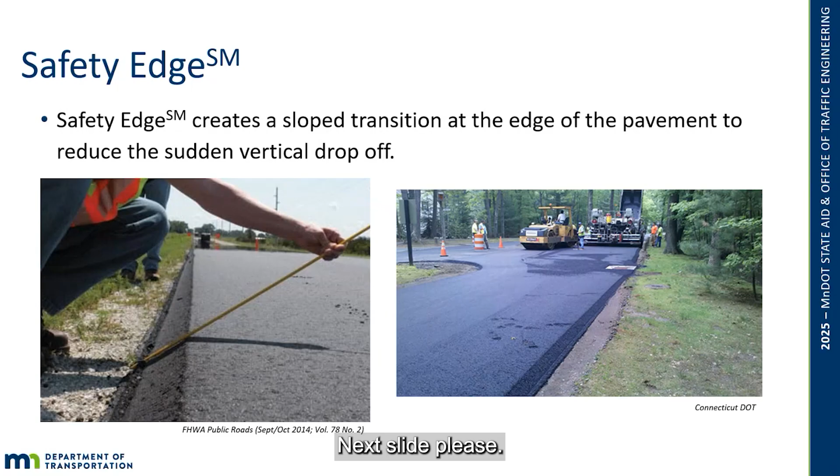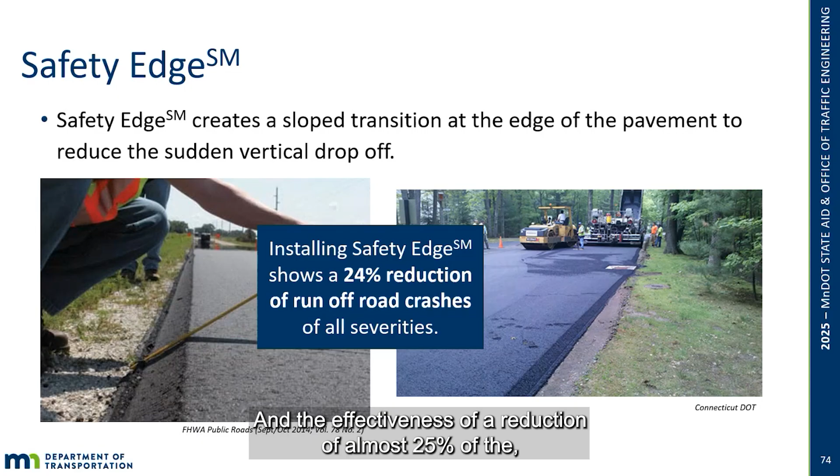Next slide, please. So again, the effectiveness: this is a relatively low-cost strategy, with an effectiveness of a reduction of almost 25% of road departure crashes. Maddie, I think you have another polling question now.

I do. Thanks, Howard. This was a quick one here. Hope that Mentimeter is pulled up and ready for you all, but we'll move on to our side slope improvements. Looks like we're starting off strong with a lot of familiarity with our side slope improvements.

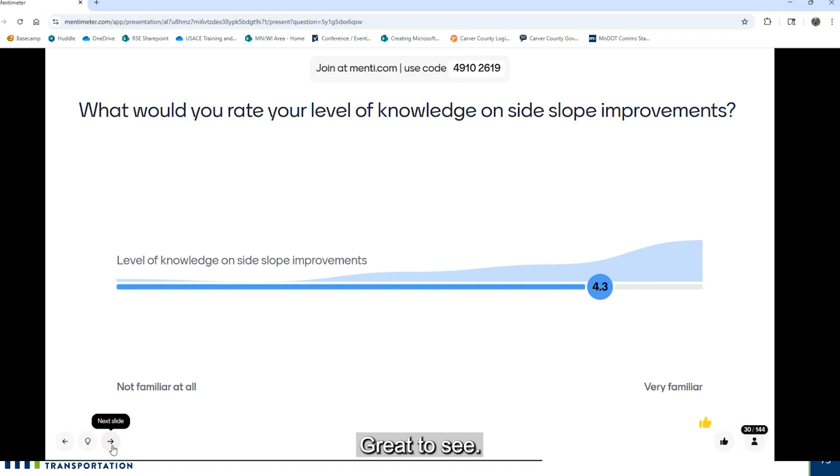Okay, let's talk through barriers. What are those barriers preventing you from implementing side slope improvements?

Cost strikes again. Right of way, absolutely. Okay, we've got a common theme here. Our right of way and our cost are certainly factors playing into that decision making on whether or not we can implement. So we'll go ahead and talk through some more side slope improvements.

Howard, back to you. Yeah, thanks, Maddie. Our roadside design guides now say that we want the side slopes to be 6-to-1 or flatter. If the slopes are steeper than that, particularly as you get to the range of 3-to-1 or 4-to-1, vehicles are going to go down to the bottom of that. If they try turning up something that's that steep, they're going to roll over. And so at 3-to-1 and 4-to-1 side slopes, vehicles are going down into the ditch or they're rolling over. And so the notion again is to provide this 6-to-1 or flatter kind of side slope.

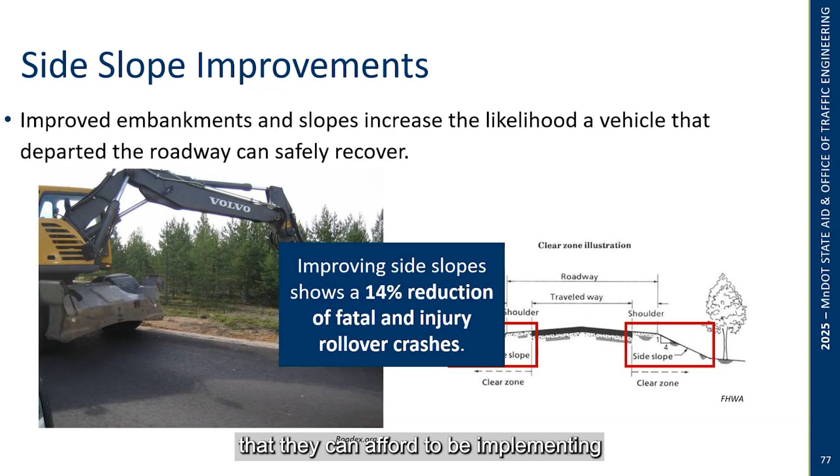Next slide, please, Maddie. And clearly by doing so, there's a reduction in the level of injury and the number of severe crashes associated with rollovers. And I get it, though, in order to go from 3-to-1 or 4-to-1, that's basically reconstruction here in Minnesota. And reconstruction, even on rural roadways, is over $1 million a mile. And there's not enough money in the whole world associated with safety that can afford to be implementing widely strategies that cost $1 million a mile to implement. And so that's clearly a challenge.

Next slide, please, Maddie. All right, so we're going to be talking about enhancing clear zones. And again, there's some very obvious things you can do to make the clear zones less dangerous. And then there's also one thing that maybe you haven't thought of that we'll talk about, which is how managing driveways and access on rural roadways is part of an enhancement to a clear zone.

Just again, background, I found that the first mention of the notion of a clear zone was AASHTO's 1967 Highway Design and Operational Practices Related to Highway Safety. Think about that, 1967. It suggests to me that prior to the late 60s, highway designers really weren't thinking of what's off the edge of the road. That just wasn't something that was a common thing to think about. So late 60s, clear zones and the notion of a forgiving roadside were mentioned again in the update that was in AASHTO's 74. I call it the yellow book because these documents had a yellow cover. And it mentioned 1974 was the first time when it was suggested that a clear width of 30 feet permits about 80% of the vehicles leaving the road to recover.

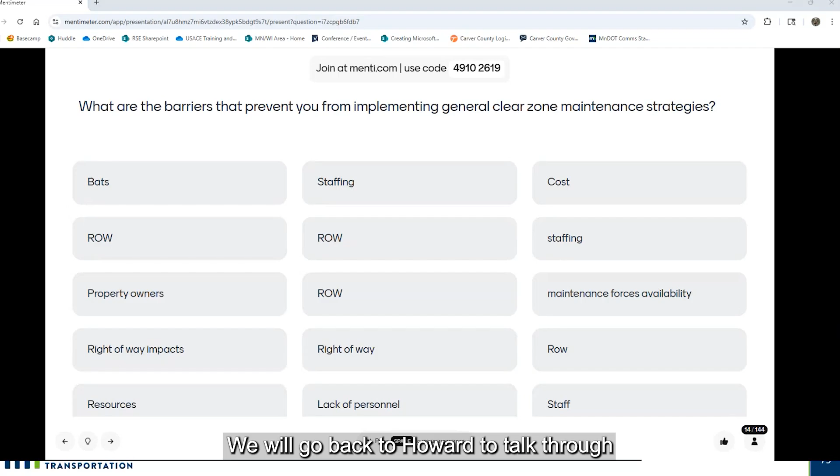And then we'll move on to talking about those barriers from implementing general clear zone maintenance strategies. Okay. Some right-of-way, some staffing, cost. Again, more staffing, maybe, right-of-way for those property owners, and the maintenance. Okay. Go ahead and keep continuing to put in your answers. We will go back to Howard to talk through this some more.

I'll go quickly through this because there's not an awful lot to share, other than when vehicles run off the road here in Minnesota, the three most common things they hit are trees, signposts, and mailboxes. Here in Minnesota, we've made the signposts and even our mailboxes on rural roads breakaway, but trees account for the most common thing that vehicles run into when they run off the road.

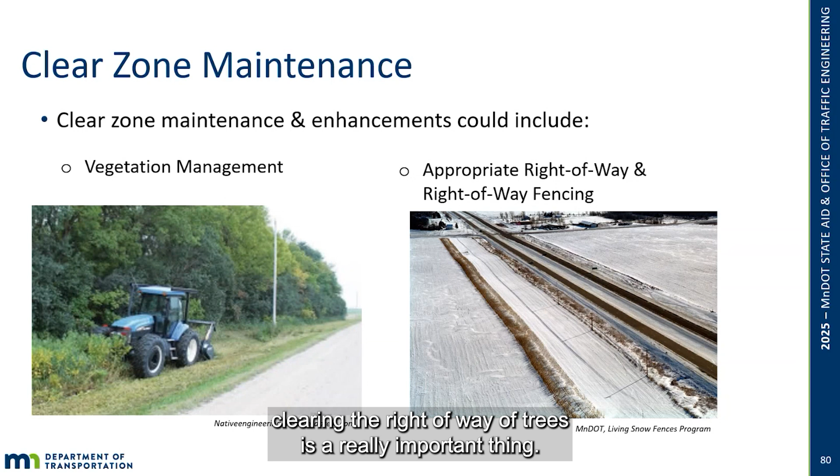30% of our road departure crashes, the obstacle that vehicles engage with is a tree. I know it's hard to cut trees down. It still surprises me that there's a group of folks out there who place trees above people's lives. They don't seem to get that. But tree maintenance, clearing the right of way of trees, is a really important thing.

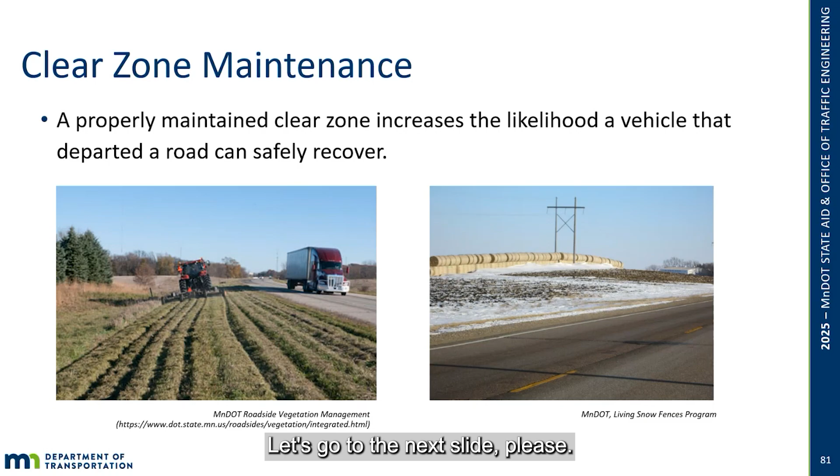Again, just showing roadside slopes that are clear and recoverable. The notion is that there's a reduction you can expect in crashes if there's nothing there for vehicles to hit, that people aren't going to be injured generally by running off into these clear roadside areas.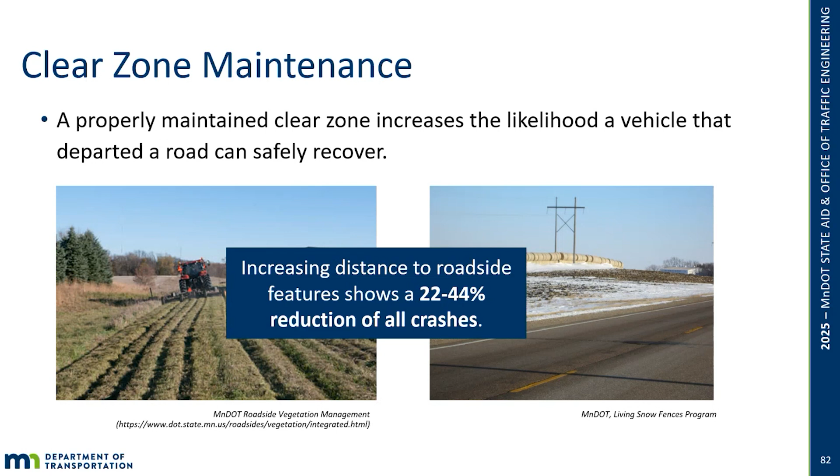Vic, why don't you share with us some things that you've observed in St. Louis County? The two pictures I want to share are the atypical county highway and the typical county highway, both on our St. Louis County road system. This is your atypical county highway, where we wish we could have a cross section like this to work with to address these roadway departure type crashes.

You can see there's a centerline sinusoidal rumble strip in this picture, but wide lanes, wide paved shoulders, wide clear zones, flatter inslopes. We have shoulder rumble strips out here, and we have places to work within to add these strategies, many of those strategies within the cross section.

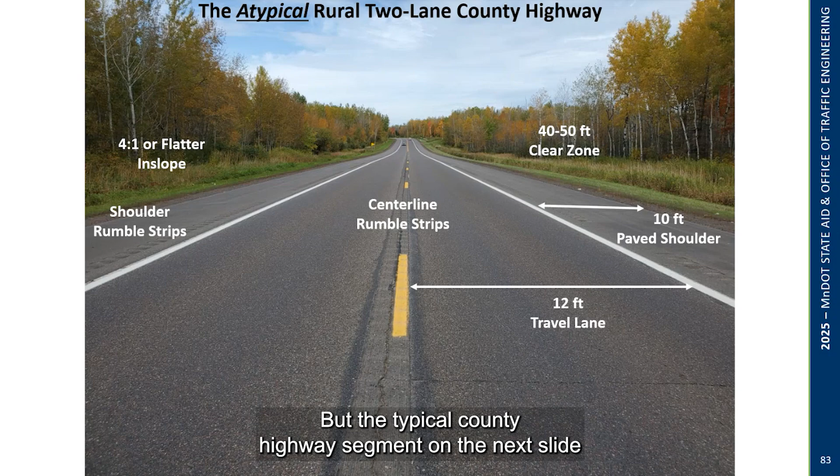But the typical county highway segment looks something like this. These cross sections were constructed well over 100 years ago. We're still living with the same cross sections today, likely not going to be reconstructed even in my lifetime. Narrower lanes, narrower shoulders, inslopes that are V-ditch style shape, in the range of 1.5 to 1, even up to 3 to 1, clear zones that are minimal.

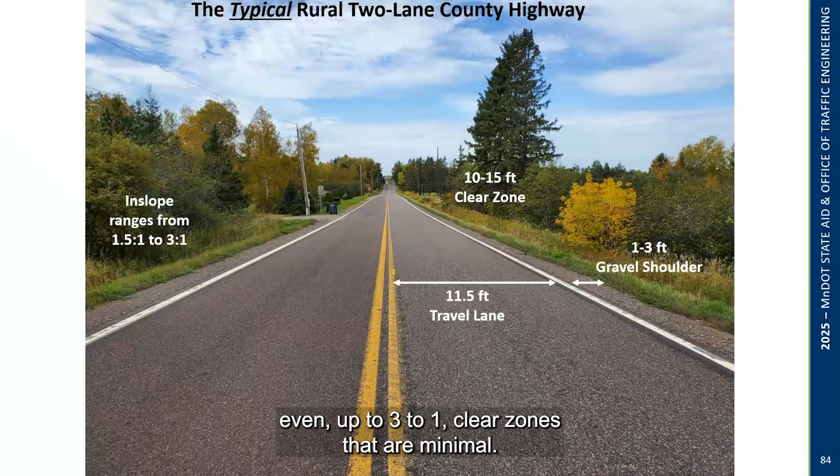So in terms of what we're doing, we really can't address the inslope area or the roadside geometry. So what we're taking is a systematic approach by doing a tree removal process. We have this program that we've implemented several years ago where we use our county maintenance forces each winter to work on clearing trees from our roadside.

The V-ditches still remain, the inslopes, the substandards still remain, but the best thing we can do, and what I'm most concerned about, is removing the trees out of the roadside area so that when a vehicle does run off the road, they're going to have some significant vehicle damage from the roadside shape geometry, but at least there won't be a tree, hopefully, within that clear zone area.

So I would encourage you to think about, from a roadside standpoint, if you can't modify your roadside geometry, just focus on removing those trees, because those trees are the number one fixed object on the roadside that's going to result in serious injury type or fatal crashes.

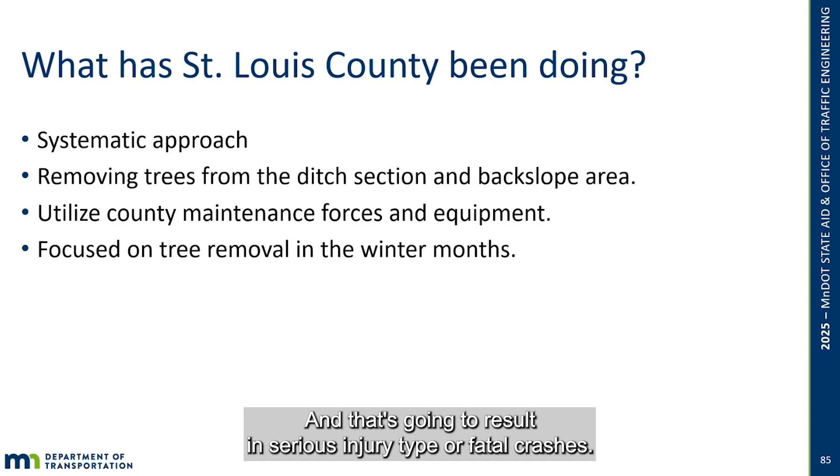All right, we have a polling question, moving on to our last set of polling questions like this. This one is on our access management and driveway consolidation strategies. Keep your Mentimeters open, we're not done with it after this, but we will be done with this set of questions. Folks are again fairly familiar with access management and driveway consolidation strategies, let's talk and think through what some of these barriers are for implementing them.

Okay, how are we working with our landowners? The public resistance. Yeah, business impacts. Okay, really focused on our communities, our landowners, the public, right-of-way zoning control, just that general resistance, and your elected officials. Absolutely.

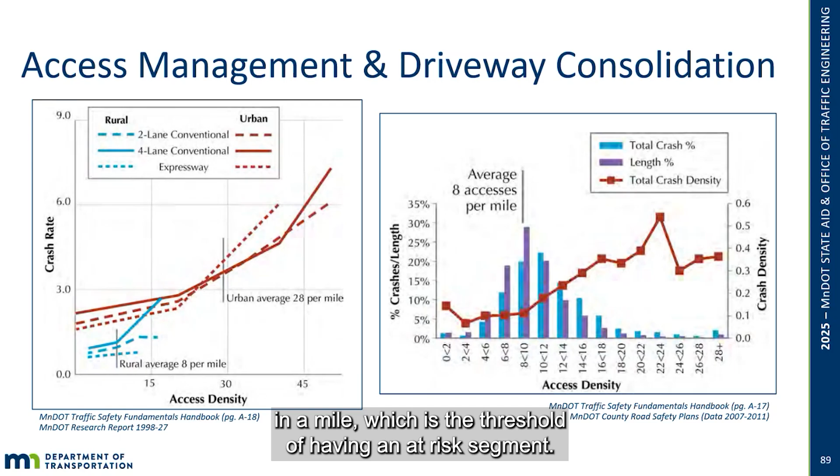But what it's getting at here again is that in rural Minnesota, you typically have 2 farms in a section of land. So there's 4 driveways, 2 on both sides. You throw in a couple more township roads, you're now up to 8 accesses in a mile, which is the threshold of having an at-risk segment. And then if there's field entrances in addition to the driveways to the farms, you're well over 8 accesses per mile, which again puts the road segment in this risk category for access.

I know one of the county engineers in the southern part of the state chose to take on a project where they went out to the farmers and basically said, let's make a deal. And the deal was, your field entrances look like they're too small for the equipment that you now have. The deal is, if you give up your old field entrances, for every 2 you give up, I'll give you 1 back that has the 6-to-1 slopes and is wide enough to accommodate your new equipment.

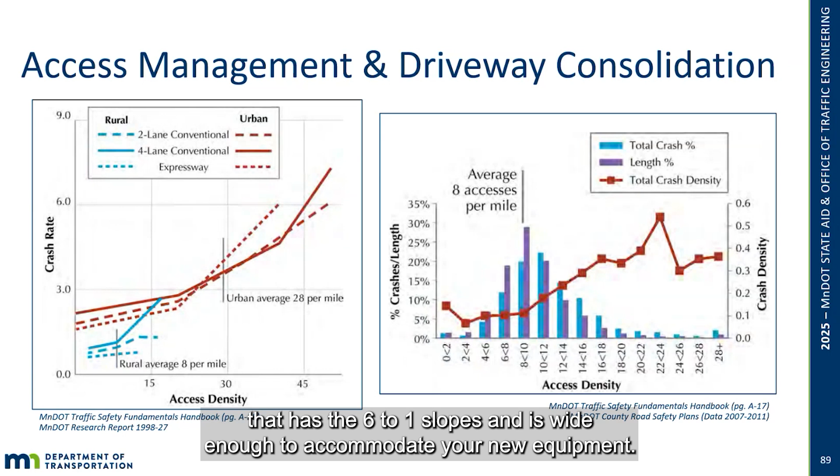Next slide, please, Maddie. And the idea being that being able to address this issue of too many rural accesses on the rural roads by working with the farmers, by working with folks to say, can you consolidate driveways? Can I give you back driveways that have 6-to-1 slopes instead of the steeper slopes? There's an opportunity to, again, reduce the number of obstacles that are out there for vehicles to run into.

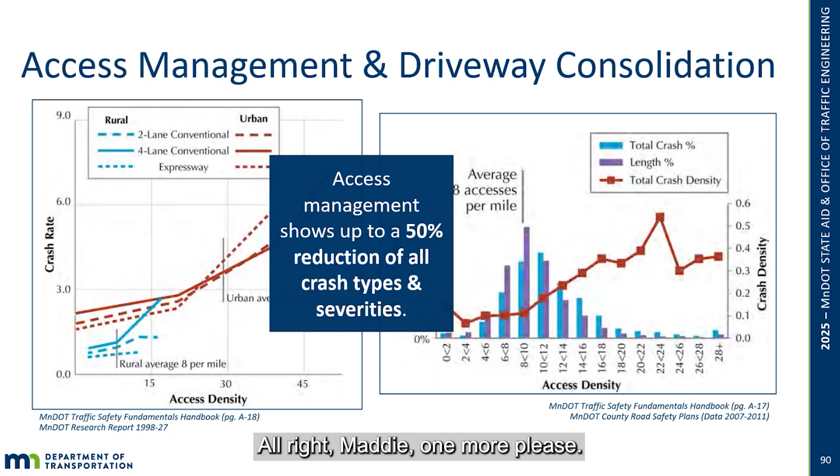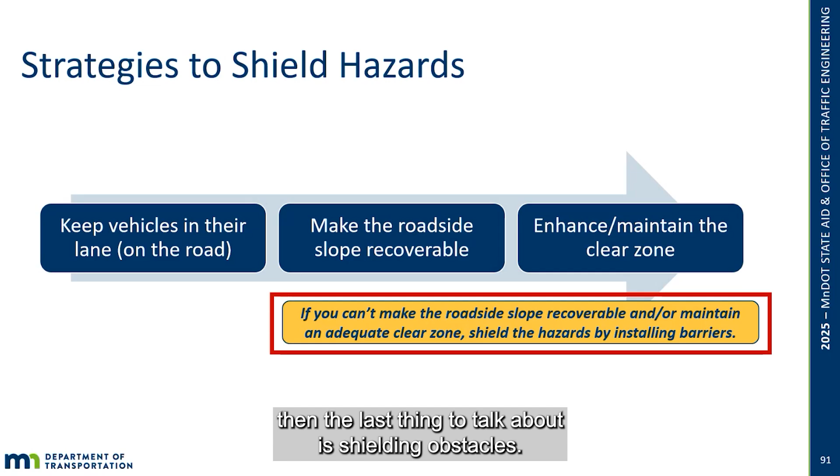All right, Maddie, one more, please. Next slide. So again, the notion: if you've done everything you can to keep vehicles in their lane, if you've tried to deal with the recoverable slopes, if you're doing what you can to remove obstacles from the clear zones, then the last thing to talk about is shielding obstacles. Next slide, please.

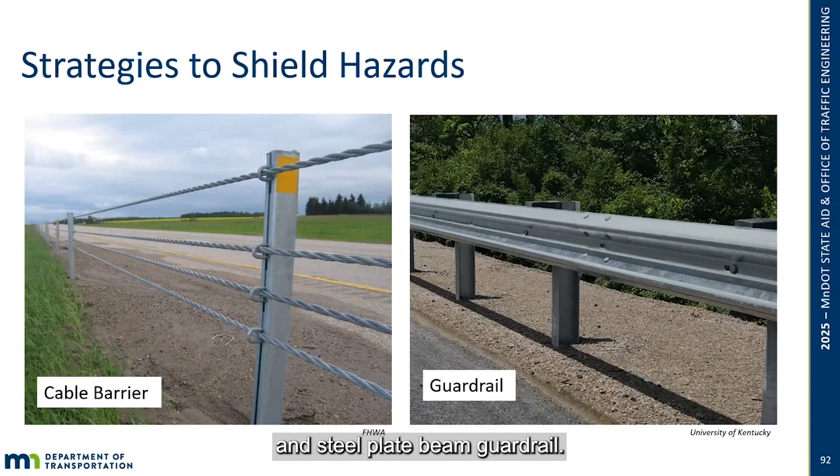In Minnesota, we use both cable barrier and steel plate beam guardrail. Cable barrier is cheaper. It tends to minimize issues associated with snow drifting. However, the cable barrier has a dynamic deflection of 8 or 10 feet, and you need to affirmatively determine that you have that kind of room behind the cable to work with.

You should also know that neither of these barriers is designed to be put up behind curb, because a vehicle impacting curb before impacting the barrier, the center of mass of that vehicle will move, and barrier is designed to have the center of mass of a vehicle at a specific spot. So these aren't solutions that really ought to go behind any kind of curb and gutter.

It's also important to note that all of the crash testing of this barrier is done at a relatively shallow angle, something on the order of 30 degrees. So no barrier is meant to be hit at steep angles, 70, 80, 90 degrees. That's just not how it would work.

And then just one final thought to share: if you're considering the use of barriers to shield a particular obstacle at a particular location, you should conduct a census of your system to see how many other locations you have that are similar. And if you don't choose to protect those also, you better have a reason, because shielding one location but not another similar location, or 100 other similar locations, I think is a real invitation to future claims of negligence.

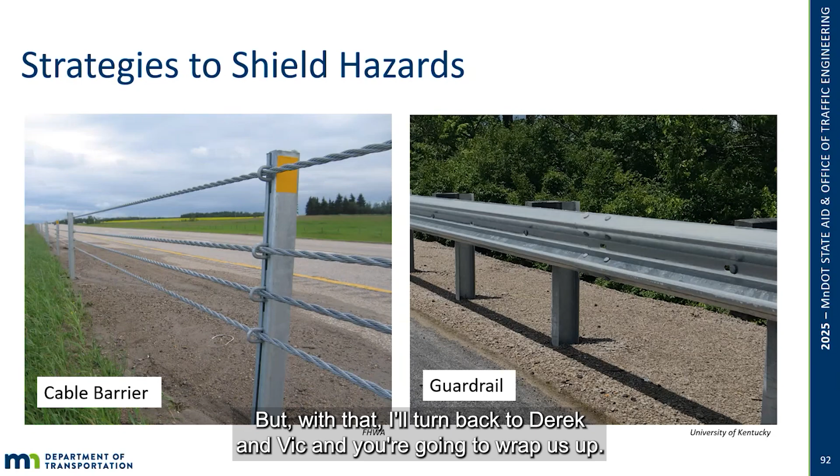All right, thank you. We wanted to end with one final testimony from the public. This one comes from Sarah in International Falls.

We were coming back from Rapid City, South Dakota yesterday and just crossed over into Minnesota. We were approaching the interchange at Luverne, which is exit 12 on Highway 90. My 15-year-old son is working on getting some driving experience, so I had him take the wheel to get some practice on the interstate. We ended up in a tough spot, and got hit on the driver's side rear quarter during a lane change. It spun us, similar to a pit maneuver, and we ended up in the guardrail.

The guardrail saved my family's life. All 5 of us exited the vehicle without a scratch. Our airbags deployed, adding extra protection. But I am convinced at the speed we were traveling, if there would not have been a guardrail, our car would have rolled without question. This is a thank you to MnDOT and your safety program. Your good work saved my family, and we are not the only ones. With that, I will turn it back over to Vic.

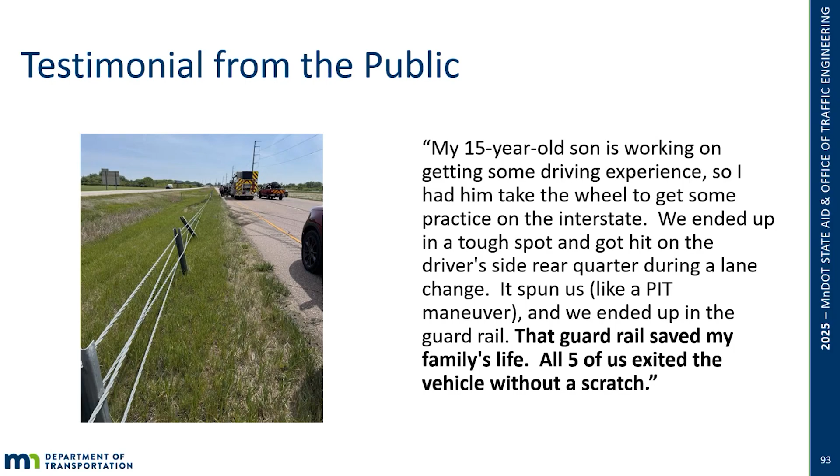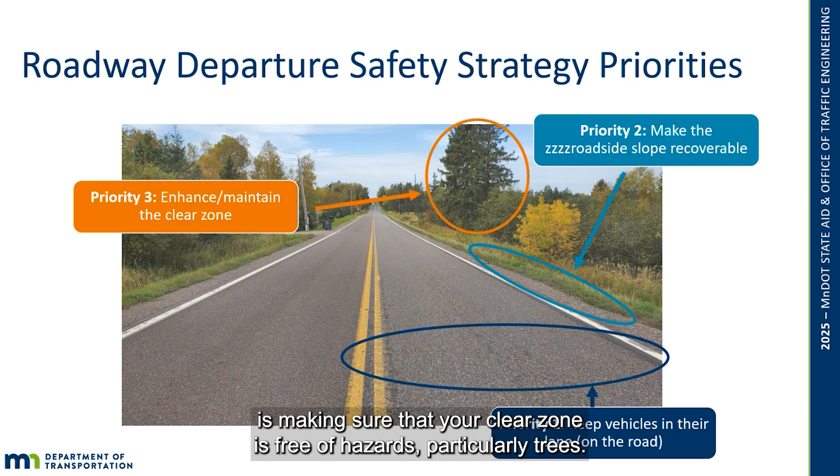All right, we'll wrap it up here. Again, quick reminder, priority 1 is keeping vehicles in the lane. Priority 2 is making sure that your immediate shoulder area is recoverable, and also providing some warning if possible to redirect that vehicle in the lane. And then priority 3, if all those first 2 aspects fail, is making sure that your clear zone is free of hazards, particularly trees. All right, next slide.

So this call to action. I've got a couple thoughts here of how do we put this into action. We've had a lot of good information here today, but with you and your local agency or your part of the world, what should you be doing? The first thing I would say is focus on your community, focus on your system.

The example I would have is I'm not particularly fond of heights personally. So when I'm working on a roof or something, what I always have to keep reminding myself is focus on my task at hand, which is putting the shingles on or doing something. Don't look around at the big picture. Focus on what I'm doing at the moment. Makes it a lot easier for me to not feel like I'm going to fall off the roof.

The same thing for highway safety. It's easy to look at the statewide numbers, the countywide numbers, or whatever the case is, and those can be very discouraging, but focus on making it zero on your community, your city, your county, your township. It'll help a lot.

Number 2, be intentional about your safety program. Make it a priority. Think about a mission statement, a board proclamation, incorporating safety into your CIP projects, identifying a champion within your agency. It doesn't have to be an engineer, it doesn't have to be a planner, but somebody who's going to be that facilitator, that champion to keep moving these projects and these programs forward.

Another idea is working with your neighboring agencies. So if you're in a neck of a state or wherever that maybe you don't have the resources, but a county or something next to you does have the resources, work together as a partnership in a region, and even think about bundling projects so they can help leverage their resources and expertise onto your system.